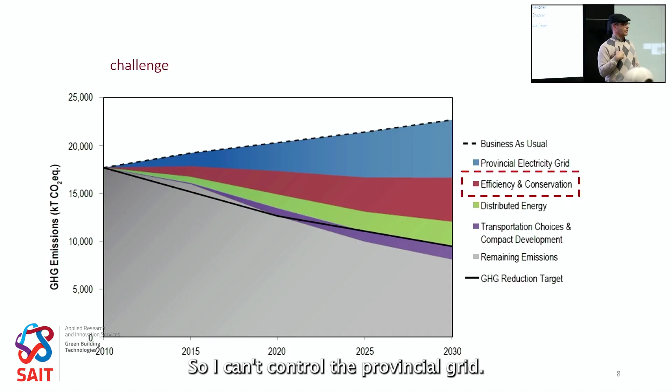The second thing I wanted to point out, and this is the wedges diagram for the province that says, how are we going to address greenhouse gas emissions overall? There are a few things that are beyond our control. I can't control the provincial grid. How they make electricity, whether it comes from a coal-fired plant, a natural gas plant, wind, nuclear, or imports it from BC, I don't control that. They do. But what I do control, and the reason it's highlighted, is that red chunk. That's energy efficiency in buildings.

And I didn't put it in this set, but if you look at the energy consumption per square meter for buildings in Canada, it effectively has been flat since 1920, which is a wild thing to say, because it means in a century of energy efficiency improvements, we haven't actually demonstrated real world energy drops. If I put my cynic hat on, that's embarrassing as an industry.

Imagine if we worked in aerospace and you said, yeah, we fly the same way we did in 1926. You would be laughed out of the room. People would look at you and go, that is ridiculous, because wooden canvas single-seaters is all we had then. I kind of like my 747s and all my important stuff.

So if I was to summarize this in a nutshell, we have a large number of underperforming buildings, a greenhouse gas and image problem. The image problem is province-wide, and no comprehensive tools or guidelines to fix this. That's a pretty big statement. And I guess I'll have to ask the question, is that actually true?

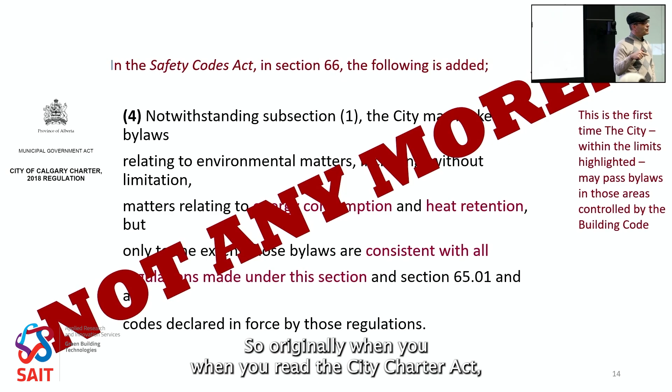This one's interesting, and I keep this in here as a reminder that nothing is forever. So originally, when you read the City Charter Act, the cities of Calgary and Edmonton were effectively allowed to set their own tiers in the energy code. That power got revoked by the province. They said, no, the province wants to set the level of tiered compliance, you have to live with it.

So we had an opportunity as a city to do whatever we wanted. We could have said we were a tier 3 city. We didn't act on it. And by the time they thought that it was a good idea to do something, the province came along and said, no, sorry, we're going to revoke that power from you. And that's why there's an important temporality to all of this, which really talks about how you deal with these things in a framework, because that's what all buildings are.

Every building, like any good architect will say this, a building is a reflection of its time, right? The reason we all go and see big cathedrals in Europe is not that we can't build them anymore, we won't. The days of having a 240-year project by master stonemasons for a church, it was wonderful. They're beautiful buildings. It ain't going to happen in my lifetime, and certainly not anymore. It's out of its context. Well, the same thing can happen in legislation.

So, long story short, for the last half dozen years or so, we've had a couple things. We've had an obligation to create and update plans. We can use environmental considerations in approving development and development permits, and we may put in place incentives to encourage. And that's not a bad set of rules to follow if you're going to want to build better buildings.

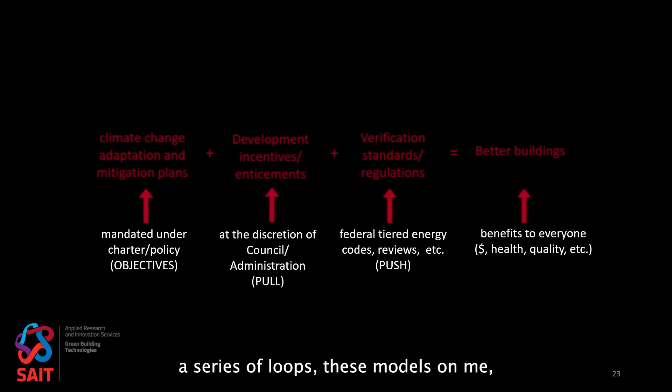And what I would suggest is there's a very simple way of looking at this, which is if I have a set of objectives that are set forth, and that's what that climate plan really does, and I can talk about a good set of incentives related to buildings that have a focus, I have my pull, and I can use energy codes and the tiers of energy codes as setting appropriate minimums, I'm going to get better buildings. And that's something this industry, as I said, has largely failed to do in a century. So that's my motivation for talking about any of this stuff today.

So let's look at some of this, because there's the realities of this, and I'm going to apologize. I am not a lawyer, and I don't know if anybody else finds the legalities of buildings at all interesting, but I will say, again, in my limited experience, the legalities of construction have as much of an impact on the project as anybody's design and anybody's craftsmanship, because they're expensive and people get sued in them an awful lot. And I do have to share this with you.

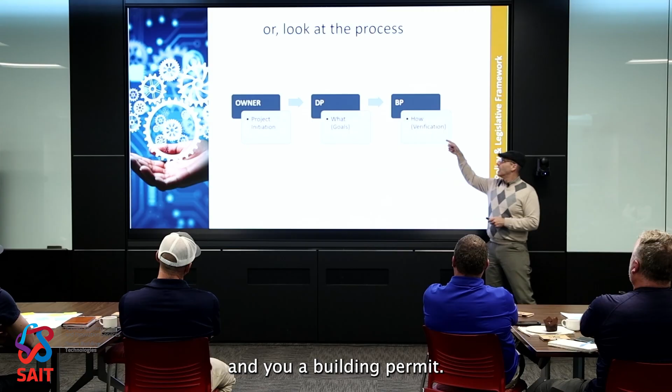And the other way to look at projects, of course, and it's not perfect for all of Alberta, but it's close. But in Alberta, you have kind of a general three-part system to talk about things. You have an owner, you have a development permit, a DP, and you have a building permit. And if I was to be very blunt in how they're done, you have somebody who initiates a project and owns it and pays for it.

You have a group of people who are looking at what the building is, how big is it, what is it used for, and you look at somebody at how it's constructed. The building permit effectively says, let's construct this thing according to what we should do. With respect to energy, the owner largely gets to set the goals. We'll talk about what that means in a second.

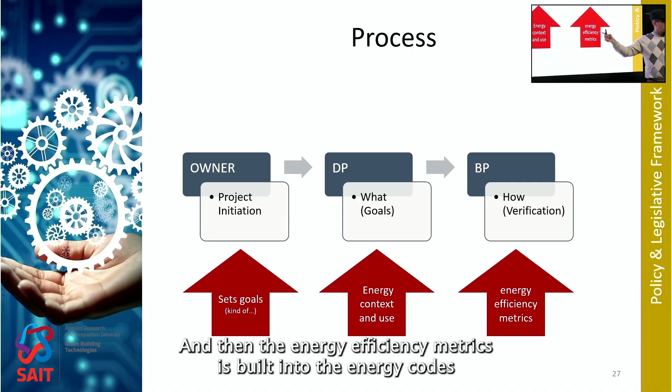Development permits set a lot of the context. So by the time you've filled out a DP, I know how big the building is, I know how tall it is, I know how much glazing it has. I've set the context. I've actually set about 35% of its energy consumption, to be honest. And then the energy efficiency metrics is built into the energy codes of how you do it. So that's what you are actually putting in there.

What is the efficiency of the HVAC units? What is the R value of the wall? What is the U value of the window? What is the air leakage of that assembly? All of those things are built into that. Together, they actually provide the whole picture for energy efficiency. And I think we have to understand a couple things.

Let's start with the base of this, which is a provincial authority, and understand two things. As I just covered in that city charter, it's unequivocally now the province sets the minimum standard. Okay? We're tier 1 province, but that's it. The province sets that level. However, two points that are often missed. An owner can do anything they want if it exceeds code.

Again, think of a code as a floor. I have to hit the floor, but I can also be up here. An owner can choose to do that. It's completely their prerogative. Anything that exceeds code, they're more than welcome to do. Second part that is often forgotten is owners.

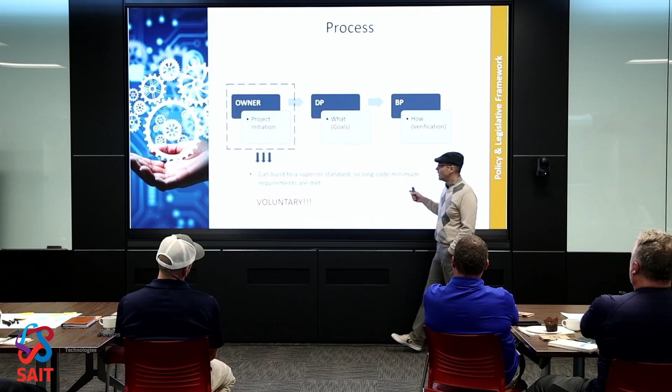When you read the Alberta Building Code, it is, again, crystal clear. Owners are responsible for building code compliance. Not consultants, not contractors, not cities. Owners. That's why those two statements are really interlinked. Because the owner is responsible for achieving the minimum standard, they can also set their own standard that's in excess of that. So, when I say they kind of set their own objectives, an owner can build to any standard they want provided it meets code, but it is absolutely voluntary.

Well, one of the things that's been really interesting in the last few years is the growing importance of energy efficiency. So don't take my word for it, take Jay Westman's for it. Just a very wealthy man, because he understood something several years ago. He could sell energy efficiency as a package to people. So Jayman does offer tier 1, 2, and 3, I believe it is, of energy efficiency packages to every home they sell. Because almost 2/3 of the people think there's a value in that. And they will give them money to do that work.

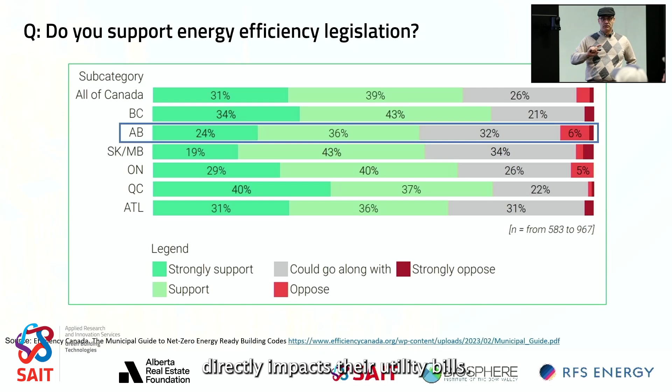The second thing is, legislatively, the public is actually in support of minimum energy efficiency legislation. And the reason being, I think, is twofold. Number one, people want to feel good about their purchase of a building, and they want to know it's constructed to a certain level of energy efficiency. Number two, it directly impacts their utility bills. Like, there's an economics driver behind all of this too. And it's funny, like when we talk about gas bills on a house, yeah, it's a few hundred dollars.

Go heat a warehouse one afternoon and see what their utility bills are, because all of a sudden now it's several $1,000s a month to heat a building, and that's a big number. You know, if you're ever leasing space, just again, I'll point it out. Don't take my word for it, but next time just check out what the op costs for leasing warehouse or commercial space are, because it's going to be somewhere between $4 and $14 a square foot. That's a non-trivial number, guys. Like, that is a lot of money that's leaving your pocket.

Right now, if I go downtown, because of the vacancy rates, I will pay more in op costs than I do for leasing commercial space. Op cost is basically utilities, the property. It's all the operational costs that the tenant pays for the owner of the building. But utilities are an enormous part of that. So it's not a non-trivial, it's not a non-zero number.

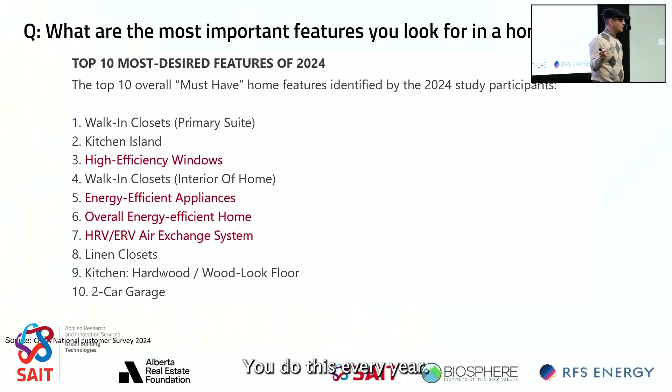Last thing, I always like this one, because when people are asked, hey, what's important to you? This is the list. This is done by the Canadian Home Builders Association. They do this every year. They basically run a survey that says what's important so we can help our builders build better homes and more sellable homes. Well, everything in red is directly tied to energy consumption. So almost half the list is some form of energy efficiency things.

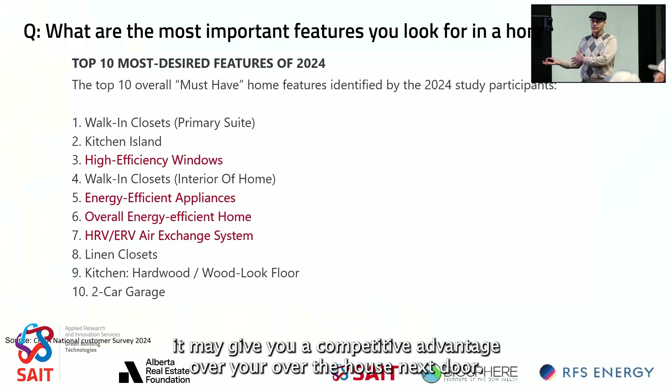Why am I boring you with this? Because the economics to making a more energy efficient home are actually there now. It's not a huge capital cost increase. It is a sellable feature that has a value intrinsic to people, and it may give you a competitive advantage over the house next door. Those are all important things if you're building 500 tract homes a year.

Now, with all of that said, as I mentioned, any kind of energy efficiency standard that's above the bare minimum is going to be voluntary. And how do you keep that in mind? I just put a pin in that, because part of the reason we have papers on the desk is we're going to ask you to think about that in a while. But please just mentally put a note in that question of how do you help or encourage somebody to do above code.

Speaking of codes, let's talk about the Safety Codes Act. The Safety Codes Act is probably the biggest one here. In short, the Safety Codes Act is a piece of legislation that makes a building code a law. Okay? If I was to just dumb it down, it sets your minimum standards, gives you procedures, gives you a legislative framework through which you can enforce building codes.

That's why when you are in industry, you will often hear the City of Calgary referred to as, and I quote, an authority having jurisdiction. That's the language that the Safety Codes Act uses to ensure that the City of Calgary gets to enforce building codes.

Just a couple quick pieces of legislation, and again, I'm not going to pretend to be a lawyer, but there's a relationship between NECB, which is the National Energy Code of Canada for Buildings, which talks about large buildings, and 9.36, which talks about smaller buildings. But the one I want to talk about most is actually this box up here. And that box is important for two reasons. You can read it at your leisure. I'll just fill in the background.

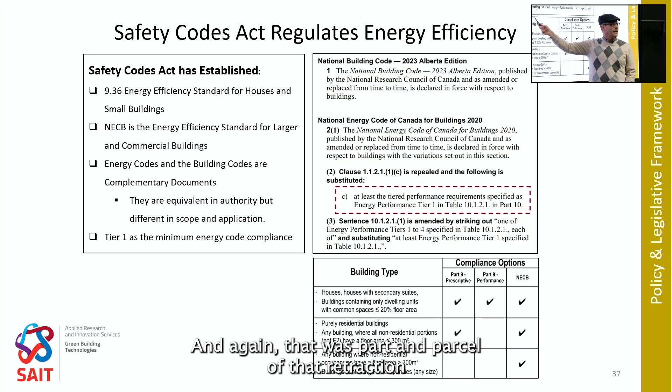It just lists the documents. It doesn't say, do this, and if you have time, do that, or do this instead of that. It doesn't say that at all. It says, here's two pieces of legislation. Go follow them. The second thing I wanted to point out, it did establish what we have as a Tier 1 province. And again, that was part and parcel of that retraction of the city charter rules that said, nope, you don't get this side. The province is going to decide for you.

Going on to this, the Safety Codes Act affects the last part of the typical process. It really talks about how you are going to do this stuff. And I'm of the opinion that there are a lot of ways you can measure building performance. Tiered codes just happens to be the easiest. And easy is important in this one because not everybody's going to be an energy codes expert.

So my colleagues in the planning department, or my former colleagues in the planning department, might have wonderful intentions. I don't want to see them try to finagle an engineering solution. That is not their layer of expertise. They're not going to know what they're doing, and they don't have sufficient information when they're looking at it to have any kind of semblance of direction for that. So, tiered codes give a very organized and very systematic way of evaluating something's energy performance.

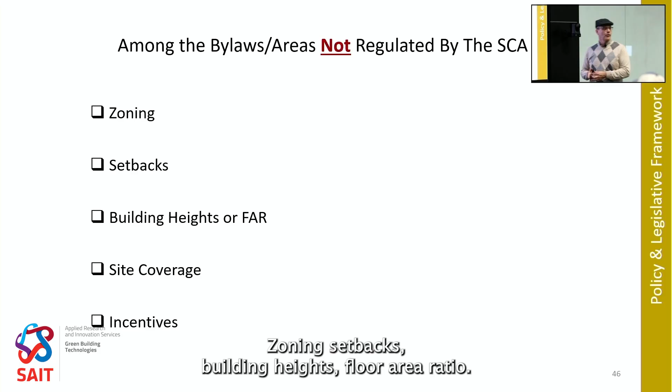But again, there are a lot of parts of buildings that are not regulated in the Safety Codes Act or under the building code. Zoning, setbacks, building heights, FAR is floor area ratio. That's the amount of built floor area compared to site. That's all it is. Site coverage, how much of the lot you can cover with building. And this is the big one. Doesn't cover incentives.

Which brings us back to this question. As I said before, please put a pin in that. Because if the question really is, how do you get somebody to voluntarily build better? I'm not entirely sure that isn't part of the answer. I can't make them do it, but I can encourage them to do it. And it's a little different than governments are used to doing. Governments are very good at saying, do X, not Y. Done. We're not very good at saying, do X instead of Y, because it's a little bit more complicated of an issue to do that.

We're going to go through this pretty quick, because I don't know what we're doing for time, but I think we're probably running a little bit longer. Some of the things, we'll probably have these up when we ask you for your feedback.

You can talk about bonus density. You can talk about policies requiring new development to meet higher tiers. How is that different, by the way, than saying you must do it? That's an option. If you want to build that building, you have to do this, or you can build this building without doing it. You can expedite permits. Okay, time is money. It's literally in buildings because they're all financed.

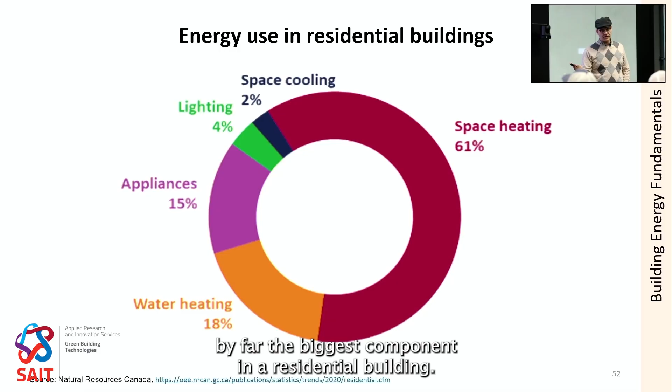Number one, the red and the orange are heat and hot water. By far the biggest component in a residential building. It's not even close. Because that is, I'm just going to eyeball it, roughly 80% of the energy consumption in a building. What does that mean? It means somebody selling me a slightly more efficient air conditioner under the premise that it's going to save me a lot of money is lying to me. That's what your takeaway should be.

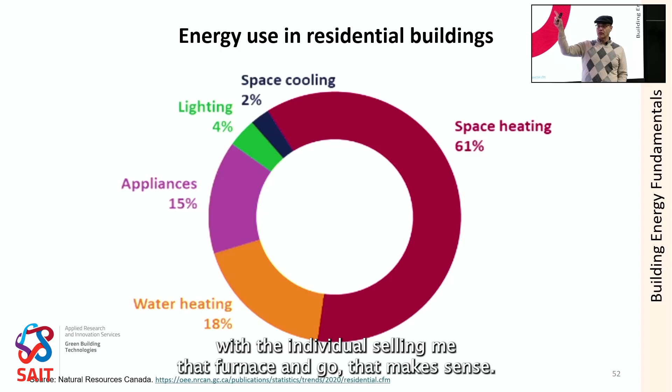But it does say if I have a 40-year-old furnace in a house that has a $400 a month gas bill, and I can get another 15% efficiency by upgrading it, that's probably worth my time. I would happily sit down and go through the brochure with the individual who's selling me that furnace and go, that makes sense.

We have to do a little boring physics on this because, I'm going to go back one, if this is the big part of the problem, then we better understand what the fundamentals of that part of the problem are. And that means we have to do a little bit of physics here. So first thing, I'm going to make a statement everybody understands, but very few people apply. Heat has to flow from hot to cold.

Okay? Which means in our climate, pretend this is an outside wall, humor me for a moment, I'm generally losing heat through walls and windows. There's a couple days out of the year where I will gain it. And yes, I do get solar heat gain even when it's minus 30 if my windows are arranged correctly. But the vast majority of the heat is going that way through the wall.

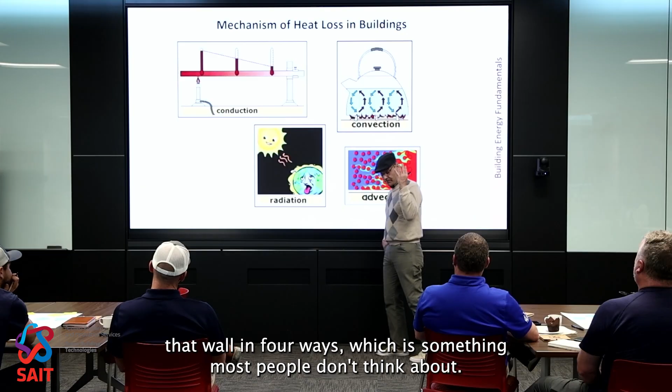The second thing to realize is it's going through that wall in 4 ways, which is something most people don't think about. While the first statement's obvious, the second one probably isn't. We have conduction, convection, radiation, and advection. So conduction, heat flow through a solid, okay? That's why your drywall is cold. That's why heat's going through the wall.

Convection, movement of fluids to carry heat. So whenever you feel that draft in the wintertime by your window, it's often just cold air that is flowing down the surface of the window. That's the actual draft you feel. It's convective current. Radiation, I know it sounds complicated. It's just the emission of infrared heat over a body. Entirely dependent on temperature, just does what it does.

Last one is advection. It's a fancy word for saying something that's quite obvious. It is the transfer of heat by carrying mass. So the example I always use, if I take a pot of boiling water outside and leave it there, I have not only carried water, I've carried a wicked amount of heat with that water. So while buildings don't typically carry water outside, they do leak air. So whenever you see the word advection, think air leakage. You're taking hot, moist air from the inside, and it's leaking to the outside.

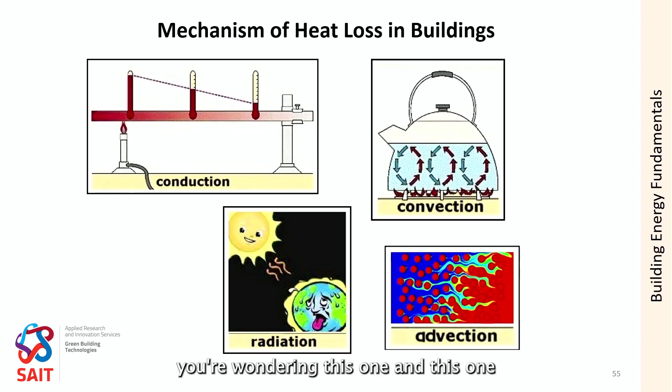I should back up for a second. In case you're wondering, this one and this one is what the code focuses on. Whenever you hear R value in a wall or U value in a window, it's just a measure of the conductive heat loss. When you hear air tightness or blower door test or air leakage, you're talking about advection. That's it. If you take nothing away from today, know that that's what the energy codes really do focus on. And why? Because they're 90% of the problem.

I do have to point out, if I take a window, windows are really interesting because they've got all 4 in spades. And that's why I always use that, because it sounds abstract to talk about radiation in a building. But take a window. So I'm going to have conductive heat loss through the individual sheets of glass and through the frames and the sashes. Right? It's solid. Heat loss is coming through those.

But I also have advection because I have air leakage around the frames, right? Air, depending on how well the window is installed, the transition between the window and the wall. I'm also going to have, if you ever look at your house, most people have double pane windows. You ever notice how consistent the spacing on those is? It's not an accident. It's because you don't want a 4-inch gap between those, because I will set up a huge convective loop inside that window. They are actually spaced an engineered amount apart, usually between 10 and 12 millimeters, to optimize the loss of conduction without forming convective loops.

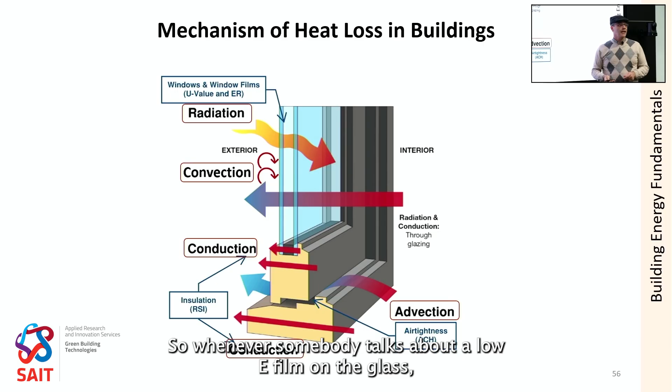And the last one is radiation. So whenever somebody talks about a low E film on the glass, we've all heard the term. The E in that low E is emissivity. You know what emissivity is? A measure of how broad the radiation spectrum emission is. It's a shorthand for basically saying this is how you measure the radiation emission for this. That's it. One window, all four. I always think that's kind of neat.

I'm going to go through this real quick just because it's just backgrounder, but R value is important because it's a thermal resistance for conduction. U value is the way of measuring thermal conduction, but it's the inverse. And that's the relationship. And I can't tell you how many times when we were talking to industry when the energy codes first came out, that was a big part of it. How you measure those things is critical. So understand that you need to be looking at RSI and USI values, and that for RSI, the better performer is when the number goes up, and for USI, the better performer is when the number goes down.

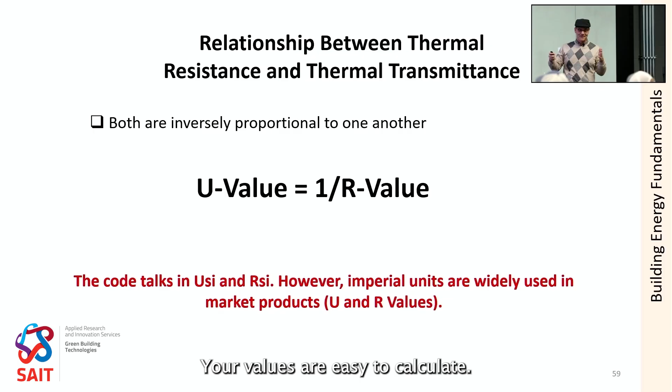And yes, I'm not going to apologize for it, but that's 100 years of industry convention. And it's really interesting. I hate to be blunt: contractor, engineer. That's literally the way to divide it up. Engineers love U values. Contractors love R values because they're intuitive. U values are easier to calculate with, or using calculations.

The other part I just want to make clear on these things is think back to that circle we showed where the space heating was 80% of the energy consumption. I love and hate these kinds of diagrams. I love them because they're good at simplifying complicated things. I hate them because they're extremely misleading, for one simple reason. Okay, I can talk about drafts being 12% of the energy loss, or walls being 33%. What happens when I put in better walls, though? It no longer loses 33% through the wall. So not only do I shrink the size of the circle of energy consumption, I actually change the proportions of where this stuff goes.

That is why when we talk about code compliance, the vast, vast majority of people don't want to use prescriptive. They want to use a performance model. And what a performance model does is basically understand that I can not only change the amount of energy this building is going to consume, but I can also tweak where it's going. And by being able to tweak where it's going, you can often get enormous performance gains. So that's important because, allow me to give a very simple analogy.

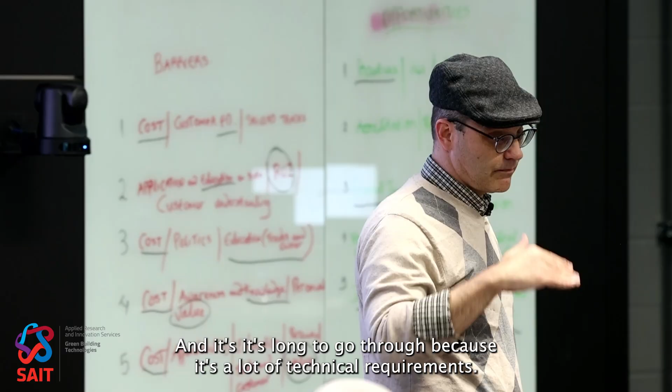What I'd like to talk about now is let's get into the code just a bit. And again, my goal this morning is not to walk you through all the technical requirements of the code. It's available online. It is free of charge. We're working with the city of Calgary to build an entire compendium document, like a manual that says this is how you measure this. This is how this should look. This is how the parts fit together. This is how an energy modeling report should look. We have all of that stuff there, and it's long to go through because it's a lot of technical requirements.

But we do have to touch on certain aspects of the code, because I think it's really important to see how codes change over time. If you recall back to when we talked about the city charter saying you need a climate change adaptation and climate change mitigation plan, one of the requirements was you've got to go back to it every 5 years and fix it because you're not going to get it right. Codes work the exact same way, right? We are constantly rewriting codes.

I guess I never actually introduced myself this morning. That's kind of funny. I'm Justin. Hi.

One of my side hobbies, in case you're wondering why I do a lot of these presentations, is I actually sit on the committees that help write all these codes. So if you ever can't sleep and you decide to break out your NECB, if you look at the authors page, I'm on there with a number of other people who sit on the committee. Back in that day, for that iteration of the codes, it was the Standing Committee on Energy Efficiency, and now it's basically the Codes Commission on Mitigation, Adaptation, and Climate Change. So they've reframed the exact same objectives of how do you make buildings more energy efficient and given them a new structure. But I keep going on writing these codes because they always change.

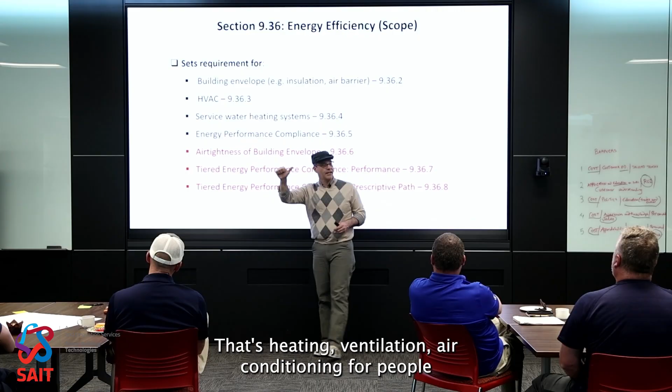That's heating, ventilation, air conditioning for people who aren't familiar with that word, although it's pretty common. 9.36.3; service water heating is 9.36.4. So those are all the technical requirements. So that is, if I'm following prescriptive and I just want to do what the book says, this is going to tell me what the efficiency of my hot water tank should be. So it's the kind of things you can check on a boilerplate and go, yep, you've done your job.

This is where energy codes get different from everything else. 9.36.5 is performance compliance. That is how to set up an energy model to demonstrate that your building performs as well as a prescriptive would have without having to do any of that stuff.

Indulge me for a second. Remember that house with all the arrows that showed the energy flows? Those energy flows are figured out by doing an energy simulation. So at any one point on that building, I can take a chunk of wall, okay? And it depends on the software you use, but it's either going to be a square foot, a square meter, or a square centimeter. But I can look at that chunk of wall, and the minute I know what the inside temperature is, what the outside temperature is, I know how much heat's flowing through that section of wall.

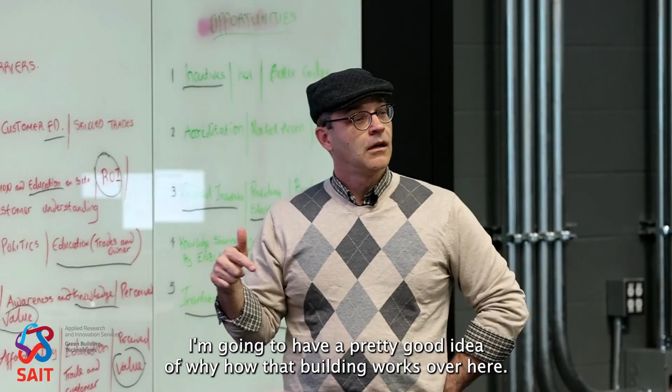And then I do the same for a window. And then I look at the lights and say, okay, the lights are on at this point, and they're going to give off this much heat, and it requires this much cooling to deal with it. And if I do that, here's a weird number, 8,760 times, I'm going to have a pretty good idea of how that building works over a year. Where does the number 8,760 come from? That's the number of hours in a year.

So what an energy model does is essentially this. Every hour, I'm going to figure out if the lights are on, if the furnace is on, what the inside and outside temperatures are, and where the energy is going. And then I'm just going to add it all up. And the beauty of doing that is I no longer have to follow a single rule. But what I do have to do is be very diligent on how I've done that calculation. So that's where this separates out, because there is no equivalent in the life safety standards.

So I'll give you an example. Part 3 of the Alberta Building Code, right? If you look up exit corridor, the number is 1,100 millimeters. Not 1,100 millimeters if there's 25 people in the room and 1,200 if there's 55. Or show me that I can go down a corridor that's 1,000 millimeters wide if it doesn't have any rough surfaces. It doesn't say any of that. It's 1,100 millimeters. That's how you comply with that code. It's entirely prescriptive.

This is the one that says energy is not the same as that, because energy systems aren't additive. And if I was to dumb it down really simply for a lay person, these are fluorescents. I'm going to throw somewhere in the neighborhood of 30 watts into these tubes, okay? Of that 30 watts, I'm going to get a certain amount of light. I'm also going to get about 22 watts of heat. The building has to deal with that heat.

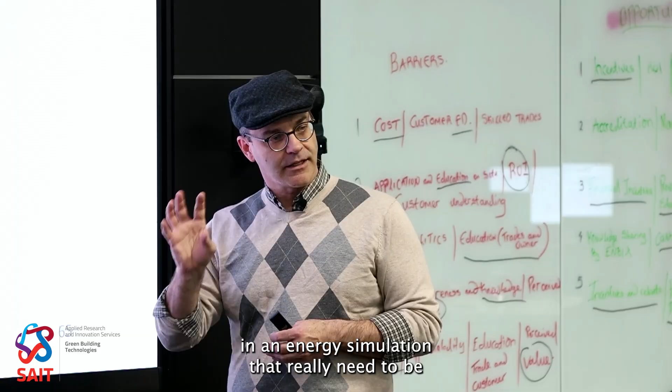It either goes into the space as supplementary heating, or in a room like this, because it's not losing heat anywhere, I have a cooling system that has to pull that out. Or this room at the end of the day is going to be 45 degrees C. And that's uncomfortable. So you have all of these interdependencies in an energy simulation that you really need to be well-versed in, is the way I would phrase it.

The red ones are new sections. So this is, as I said, codes change. The red is all the new stuff. Air tightness of building envelope. Huge change from the last one. I hate doing this, but just to show we haven't all wasted our time together this morning, could somebody yell out what the heat loss mechanism of air leakage is? I see somebody mouthing it. That's good enough. It's advective air.

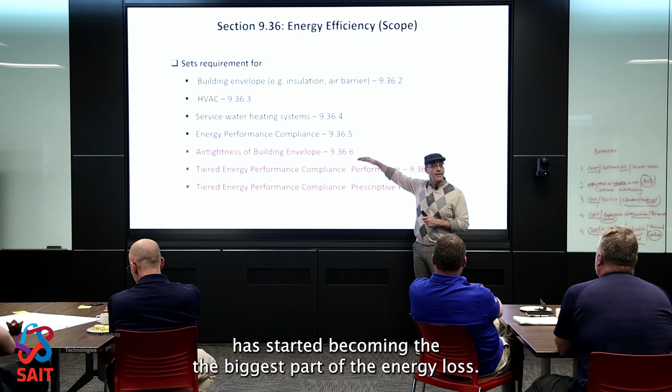It's advective heat loss. But this has become a big part of it. And again, think back to what I was saying this morning about the proportions. Why? Because we've gotten good enough at the envelope that air leakage has started becoming the biggest part of the energy loss. That's why it has to be improved. Here's the tiers.

There's 2 ways to comply in 936, and we'll go through those at a little bit of depth because, well, frankly, that's why we're here this morning. Let's look at some of the changes in the building envelope. We'll just do this very quickly, capture a couple of key components that are really fundamental to understanding the tiers, and a couple of key features that are new.

We'll go back to this guy. There's my energy loss for my building. As I've said, the circle can get bigger or smaller depending on how overall energy efficient the building is. The proportions can change. The one we're dealing with now, building envelope, affects directly space cooling and space heating. So somewhere about 2/3 of the energy. If we were doing the compliance one, I would say from a 936 perspective, that's where I would spend at least 3/4 of my time if I was a safety codes officer still. I'd be worried about the envelope because it's the biggest chunk of the energy puzzle.

A couple things that are in here. You can read this. I'm assuming we're going to distribute the presentation afterwards. Okay. Read these at your leisure. It's probably not worth us going into it in a big way, but everything from updates to log walls, who cares, to changing the rules around Part 10.

So fundamental concepts of building envelope are really simple. We break the building envelope down into parts. And that's important because not all parts have the same ability to get upgraded. And I probably didn't mention this earlier, but I should. Whenever we make a code change at the national level, one of the things we are obligated to do is a cost-benefit analysis. And that's a big part of it because housing affordability is a big concern for everybody.

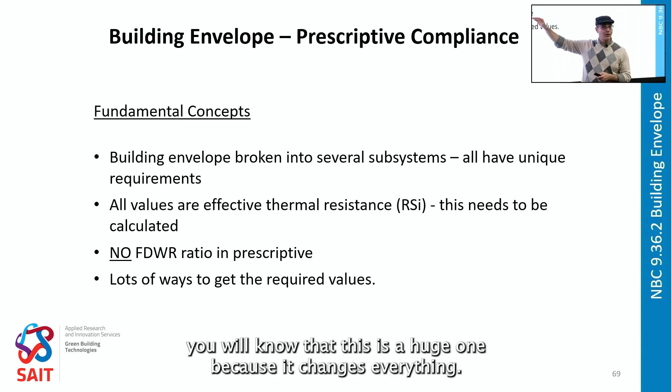Everything in an energy code is effective thermal resistance, not nominal. We'll talk about that in a second. This is a huge one. And if anybody is ever working with NECB, you will know that this is a huge one because it changes everything. FDWR, fenestration and door to wall ratio. That probably still doesn't mean anything. Think about it this way. Fenestration is your windows. Doors are doors. Wall is the opaque sections of a wall, so the stuff that's not a window. And the ratio is the percentage I can have of each of those. Why is that so important? Because as I mentioned earlier, a window is about 6 times more thermally conductive than a wall.

So if I have to reduce energy consumption on a building, one of the fastest, cheapest, technically price positive, well, one of the things I'm very tempted to do, make the window smaller. Go look at a research station in Antarctica, and they just have these little portal windows because that's all they can afford in terms of the thermal losses.

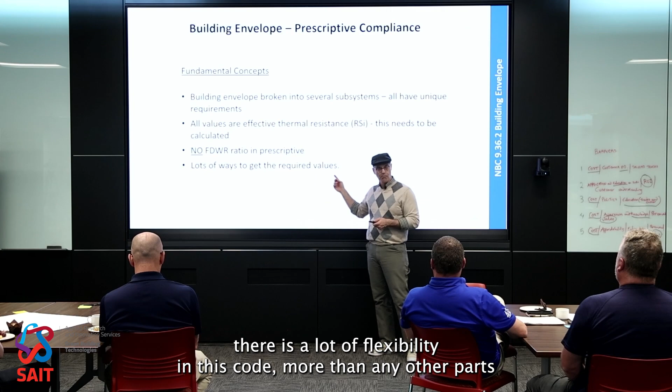Last thing, there is a lot of flexibility in this code, more than any other parts of the NBC. And that flexibility is both a positive and a negative. It's a positive in the sense that it does give you a lot of compliance options. It's a negative in that it is much more complicated to write a code with options. We'll go back to that corridor. It is really easy for a building inspector to go, is this an exit corridor? And when somebody says yes, to go to the tape measure and go, yep, it's 1,100 millimeters or wider. That's an exit corridor where I come from.

It's a lot tougher to say, oh, I've improved my windows, so I've degraded my wall, and at the same time, I've improved the efficiency of my hot water tank because I didn't want to use a heat pump in my heating system. Well, wait a second. Now I've got 4 things all talking to each other. That's a very complex code from that perspective.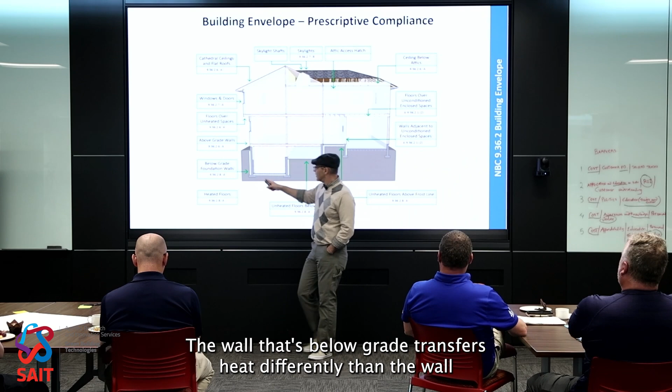This is just a little handy-dandy guide, and we're not going to go into this in depth. But as an indicator of how many parts there are, the CHBA actually put this diagram out that said, let's understand something. The wall that's below grade transfers heat differently than the wall that's above grade. Why? Two reasons. Number one, I'm allowed to keep basements at a colder temperature in the code. They actually only have to be heated to 15 degrees, whereas upstairs has to be 22.

Second part, this dirt 8 feet down is only going to vary between maybe 0 and 7 degrees C. That's the thermal driver. This air can go between plus 35 to minus 35. Huge differences. If I'm going to construct an energy simulation, I need to know all that stuff. We haven't even gotten into the fact that if this wall's in sunlight, that skin temperature is not air temperature. That skin temperature might be 60 degrees C.

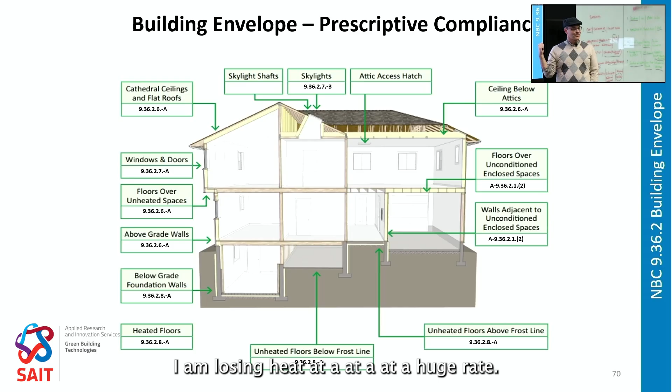So on the coldest day of the year, I might have heat coming in on that wall, and on the north wall, I am losing heat at a huge rate. So you can understand how, again, the complexity of this can come back to it. But in general, things are defined broadly as either in contact with ground or not in contact with ground. And I know it sounds funny to say a floor not in contact with ground, but that's code language for a cantilever.

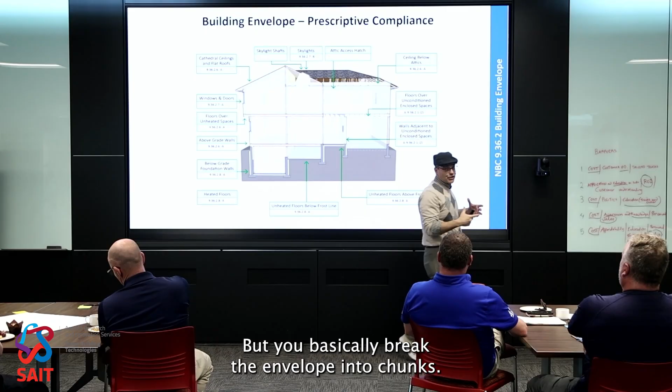Windows are separate, roofs are separate, and they're broken down to attic roofs and cathedral roofs, but you basically break the envelope into chunks, is what you do. And they each have their own requirement. All of those RSI values that are in the code are effective, as I mentioned. An effective R value means not the nominal, but what does the assembly get? Okay, that is a calculation.

I mean, I've been doing this a while. I can tummy rub and get you close, maybe 5 or 10%, but nobody knows exactly what that translation is. We'll talk about that in a second. But the nominal is basically this. When you see a bag of insulation on site or the Styrofoam SM printing on the side of the material, it's a reflection on the material. The effective R value is how that assembly behaves.

So it understands that I've got other components that contribute to thermal resistance. I also have bridges or breaks in the insulation that say, oh, that's going to be a degradation. And you have to calculate that out. There's no other way around it. I always say this to my former colleagues at the city, I wish I could tell you one was always bigger than the other. I can't. It depends on the insulation type, where it's placed, if it's exterior continuous or not, et cetera.

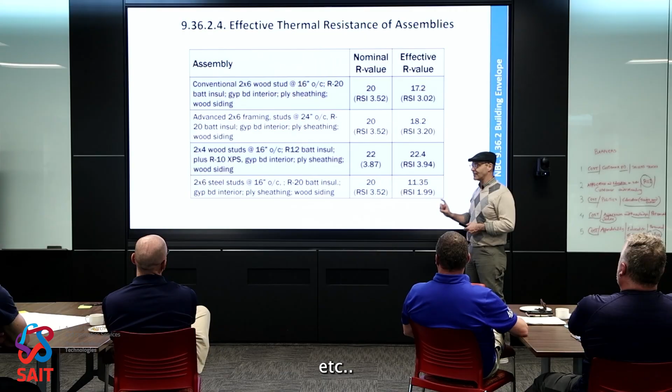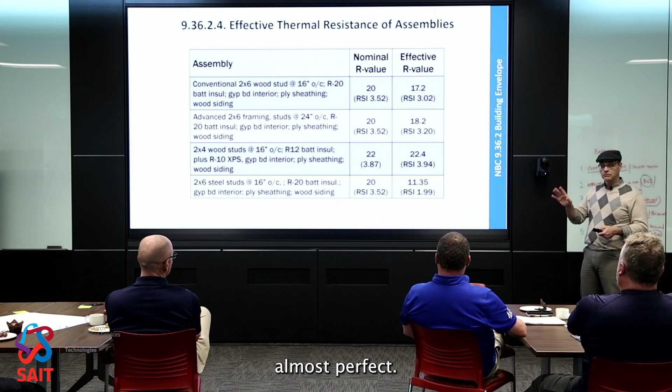Basically, this is just a quick comparison between nominal insulation values and effective, but I do want to point something out. They can be vastly different numbers, especially if you're dealing with steel and concrete buildings. The minute you put steel in a wall, I have an almost perfect thermal conductor. Almost perfect. If you actually look at steel studs, that's how they're calculated. Hypothetically, if this blue line is the steel stud, not only do I worry about what the insulation is here, I actually have to zone it out because this thing is so conductive of heat, it will draw heat laterally into itself through the wall.

Concrete's not a whole lot better. As an indicator, just good rules of thumb. If I'm looking at insulation or anything that's readily available, I'm looking somewhere between R3 and 5 per inch. Okay, RSI, or R, thermal, like imperial R. Wood, about R1 per inch. Concrete, about 0.1 per inch. So about 10 times more heat conductive than wood.

I go to steel, depending on whose numbers, but it's generally 0.0000 something. About 1,000 times more conductive than wood. Yeah, those are non-trivial numbers. Like you can't put a giant chunk of steel in a wall and go, I don't see a difference. There's the difference.

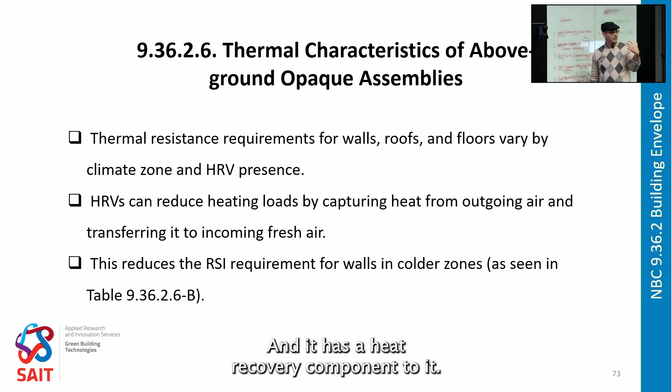When we talk about all of these things, one of the things that is really interesting in this is the presence of an HRV. HRV, heat recovery ventilator, you may have heard of. You also get the term ERV, energy recovery ventilator. It basically means it's a powered device that pushes air in and out. It ventilates the building, hence the ventilator, and it has a heat recovery component to it. When you are looking at this, you have to understand that the R values are going to change whether or not there's an HRV.

That is unique to 9.36, by the way. But it's important. And the reason it's done, I can explain the logic path that led to it: HRVs are not mandatory in 9.36. So what they wanted to do was say, well, how do I set up an equivalent level of performance between a house that has an HRV and one that doesn't?

And so what they did is they modeled the HRV houses, and then they made you add additional insulation if you don't put in an HRV to compensate for the heat loss through the ventilation system. So it was an attempt to balance this stuff out. Why? Because code should be intrinsically fair. They're not, but that's what they try to do.

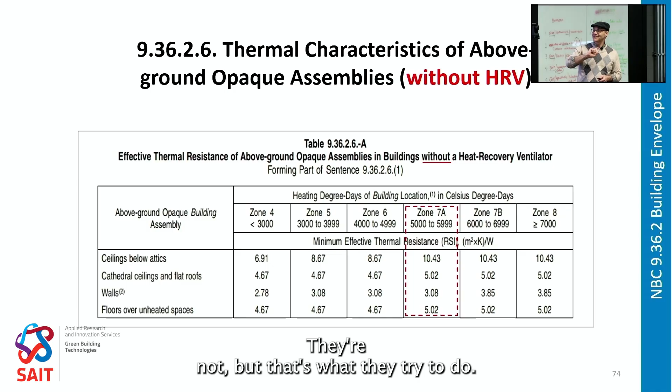But I just want to point out a couple things. So this happens to be without, but again, when I said certain parts are easier or harder to insulate, you'll note that you are required to put about 3 times as much insulation into an attic as you are to a wall in a house in Canada, in our heat climate zone.

The other thing I should point out, just because it might be a new term for some of the people here: the concept of climate zone and heating degree day. If I use heating degree day, can I get a quick show of hands? Does that mean anything to anybody? A few. Let's take just 30 seconds.

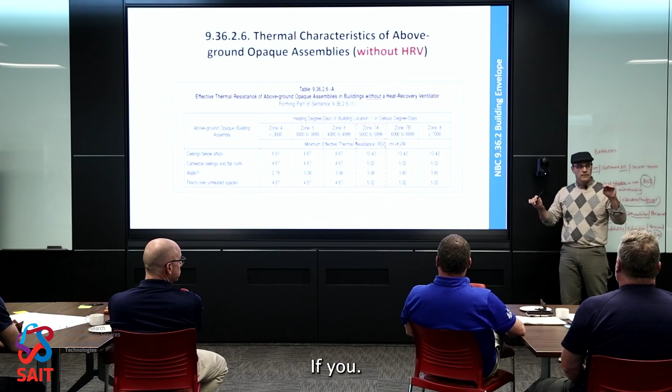Heating degree day is a number, okay? And that number is going to range in Canada somewhere between 2,800 and 13,000. What does it tell me? It tells me two things. Effectively, it's a measurement of how cold it's going to get and how long that cold is going to last. So basically, the larger the number, the more coldness I can expect. Coldness being temperature or duration or both. And it's just a calculated number.

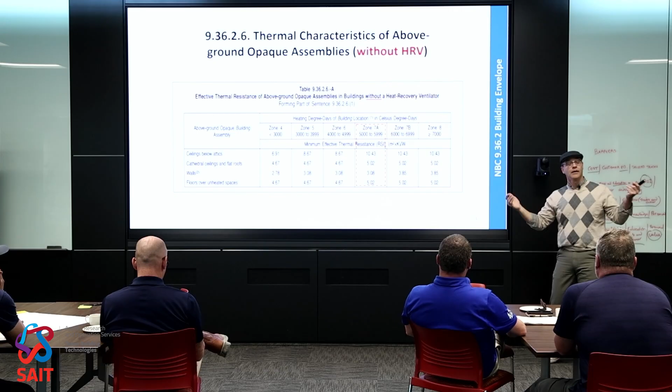If you ever can't sleep one night, Appendix C has hundreds of locations across Canada and their heating degree day zones. So it's just a way of measuring basically the climate you're in and where your building's going. Calgary just happens to be exactly 5,000. It's an easy number to remember. Zone 7A.

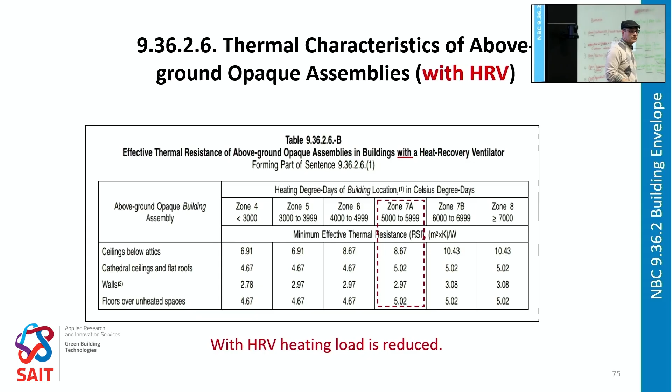Again, this is just to demonstrate the change in the values. That was 10.43 without an HRV. It drops by over a full point because you put in an HRV. Just in case you're wondering, I always like to tell people to stick a pin in an idea. When we come to the next set of questions, we're going to talk about cost

benefits of these things. This should be a big part of it because this entire change of numbers is dollars driven. Nothing to do with building performance, nothing to do with the mechanics, all of it to do with dollars in and how much you can change something in a building.

Windows. Windows have two ways of being measured in here. As I mentioned, windows use U value, not R value, so the inverse of it. So the smaller the number, the better it's performing. And because the window manufacturers can never make windows simple enough, they've also given us an ER number. An ER number works the exact opposite, where the larger the number, the better it performs.

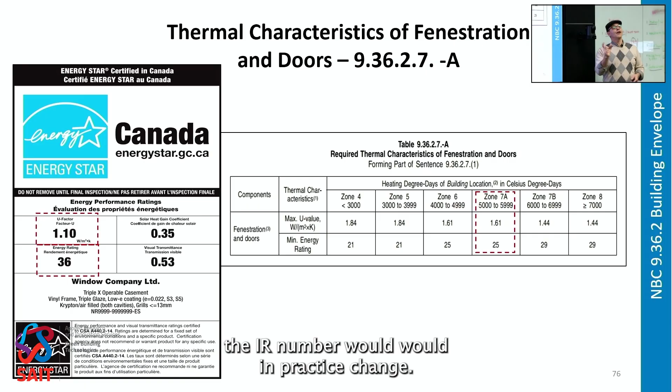But what this is trying to capture, in case you're wondering: U value is a measure of the conductive heat loss. ER is an attempt to capture the conductive heat loss, air leakage, and radiation. I personally hate it, but that's an opinion. The reason I don't like it is because the ER number would in practice change if I go from the north side of a building to the south.

And you'll note there's no criteria on this. It's not 25 if it's on the south, 21 if it's on the north. So it's a little bit of, I call this tummy rub engineering, but it's a shorthand way to try to capture a very complicated issue. It does so with moderate success.

Air tightness. Here's where we start to get into the air tightness journey. Now, for those looking to comply, or for those who are going to be using the energy code, air tightness in 9.36 is in two locations. One that is basic principles, the other for specific applications. We'll cover both. This is the general principles.

So one of the attempts to address air leakage in the NBC is you have to do a certain amount of detailing in the construction. And 9.36.2.9 sets the criteria. 9.36.2.10 tells you what to do.

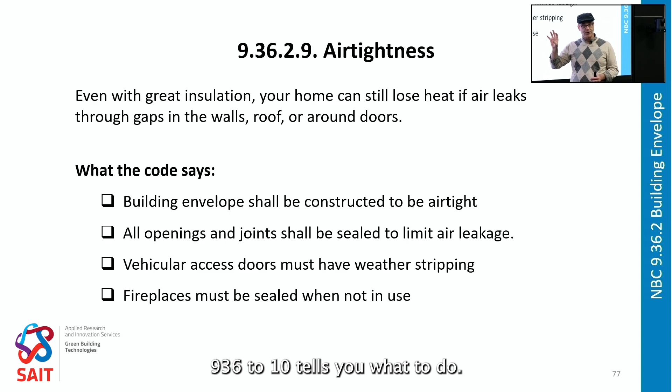The challenge with all of these things is how you measure air tightness, because without doing a blower door test, it's all a bit of hocus pocus. So if I'm doing prescriptive, 9.25 is what covers basic installation of air and moisture barriers, okay? So it talks about how you use polyethylene sheet, where it goes in a wall, what you would do with the joints, etc. 9.36.2.10 then tells me, okay, at that joint, I have to have these criteria. So you have to read the two of them together.

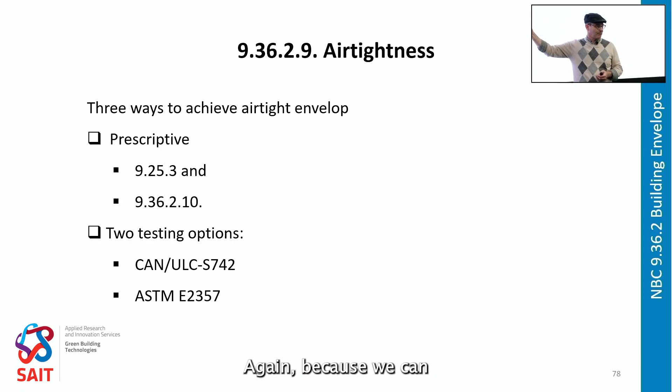You also have testing options. Again, because we can never make things simple enough in an energy code. 742 and 2357. I'm not going to bore you with the details of those. They are assembly tests. So what's important about an assembly test is twofold. Number one, it has different performance values, okay? Number two, it has a set of details that talk about the transitions. So what you may have noticed, the common thread between all of the prescriptive air barrier requirements in 9.36, this tells me how to deal with transitions. This tells me what the air leakage around a detail at a transition is. The common point of both of them, the transitions.

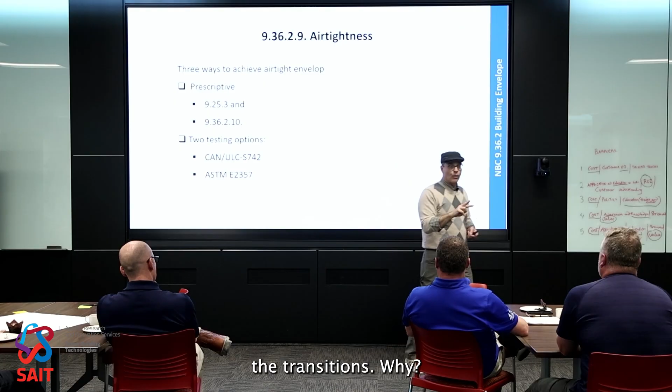Why? Because buildings do not leak at the flat parts of the wall. Okay? Glass is a great example. No one thinks about it, but glass is an absolute perfect air barrier. At where my finger is, I get exactly 0 air leakage. I don't care what the pressure is until the window snaps. What about here? What do I do with the transition? That is where 100% of the air leakage occurs, is where you have junctures and joints. That's why what is interesting about all of these, nowhere in the code does it talk about quality.

That's a problem. It's why, when we talk about the other place where air barriers are described in the code, 9.36.6, it tries to address quality, or at least how you might deal with that. Because the quality of that transition is everything if it has to be airtight. I can take the exact same materials, apply them in the same way. If I do one sloppy and one well, the air leakage will be 10 times greater in the sloppy one. And I'll share an anecdote as an idea of how complicated this is.

At one of the meetings at the standing committee, we had a representative from CHBA. We were trying to figure out what the cost of better air barriers was. And they pegged a number that said, well, that's a $3,000 per house cost. And I threw my hand up and said, it's a zero cost. And they go, how do you figure that? And I said, it's in the code of what you should have done. And the reason we had such vastly different numbers on what it should cost, they were putting a value on the time it took to do the quality. My position, right or wrong, was that the quality should have been assumed because it's in the code. There is no right answer to that, by the way.

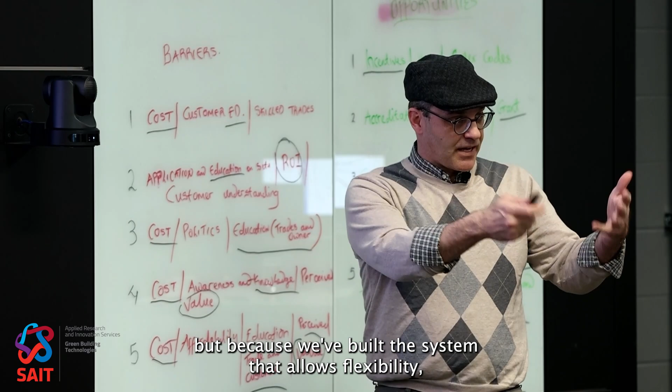I don't know what it costs. It might cost somebody $15,000 because they have to go from being completely inept to being fantastic at it. It might cost somebody nothing because they've been doing it all along. That's the trouble. I'm belaboring this point just a bit because it really sums up a lot of the energy code challenges. You've told me to do this, but because we've built the system that allows flexibility, now the quality of the installation starts to become a real challenge.

We've probably beaten up envelope enough. Let's go into HVAC, and it should be relatively straightforward. Again, it affects the exact same two areas: space heating, space cooling. Why? It's the equipment efficiencies to heat and cool your space. It does not affect water heating. I know it sounds obvious, or some people think it should. There's a whole different section for hot water, so we left that out. But again, as an indicator, part of the reason I always talk about this when we do the compliance discussion with the City of Calgary, it's basically shorthand. Pick your battles.

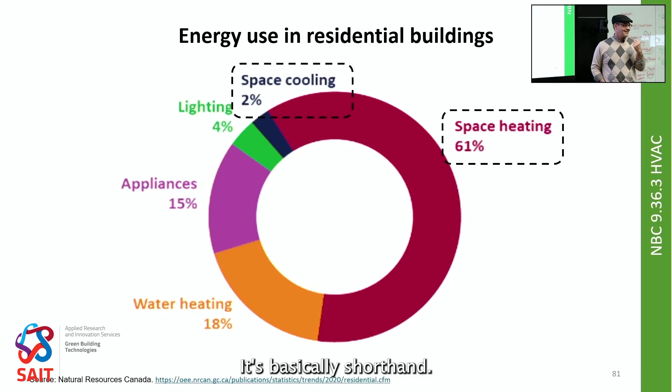So if I can look at the building envelope and the heating and ventilation equipment efficiencies, right? That's two pieces of equipment. It's your HRV and your furnace, basically. And I can look at the walls and the air leakage test. That's four numbers I have to look at. And I'm going to roughly cover 2/3 of the energy consumption in that building. Why would I look at anything else? If I have X amount of minutes to spend on this drawing, don't spend them looking at the cooling. It's just not going to help you. Let's figure out the big ones.

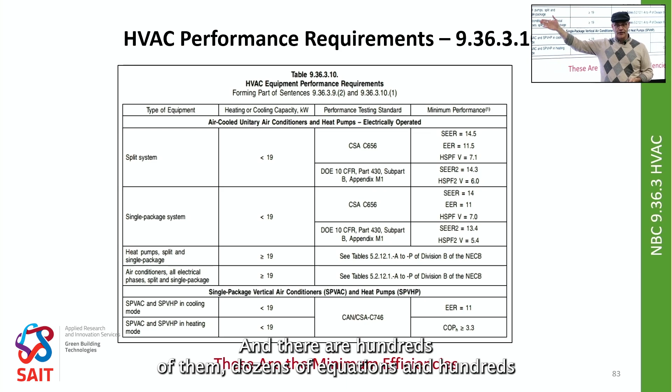And there have been very few changes to the HVAC requirement in this. The way to read these charts prescriptively is actually pretty straightforward. It's basically a sizing and efficiency exercise. So all you really have to know: what is the piece of equipment? And there are hundreds of them in the code. Okay? It'll have a size requirement.

Why? Because bigger equipment is often easier to put more efficiency measures on. And also, because you're producing so much, you're consuming so much more energy, we expect it generally to be a little bit better at what it does. And the last part, just the metric of how it's measured. And the beauty of all of this is it's on the piece of equipment boilerplate. It's one thing to look at.

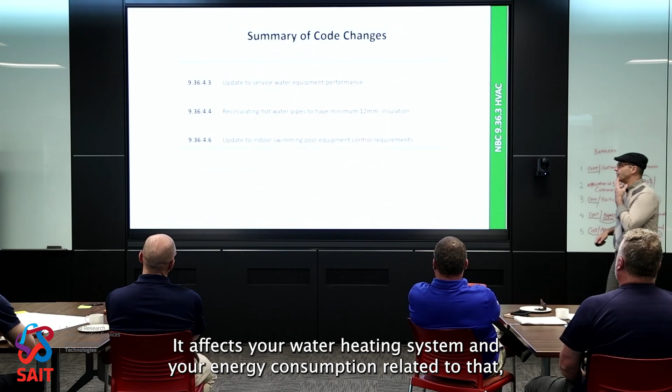Service hot water, that's the other kind of major component of 936. What a shocker, it affects your water heating system and your energy consumption related to that. A couple things. This is just, again, really more for general knowledge. Basically, the hot water systems in your home, which is different than NECB, what they're trying to cut down on is extraneous line loss. So insulating pipes and making sure those are in place. Heat traps to prevent thermal siphoning, and the equipment efficiency. That's it. It's relatively straightforward.

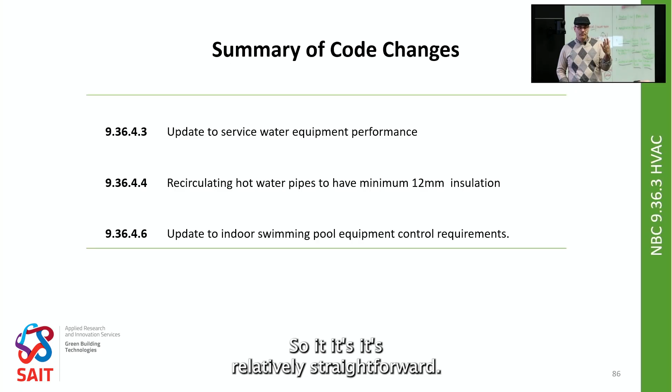It doesn't go into elaborate calculations on the number of faucets, etc. NECB does that. It talks about your consumption. But 936 is like, I got 5 people here, I'm not going to change it much, and I can't control it. So let's just look at the equipment and the insulation. Same pattern. Tell me what your fuel source is. Tell me what your sizing is. And tell me what your efficiency is. Everything's on your boilerplates. Literally.

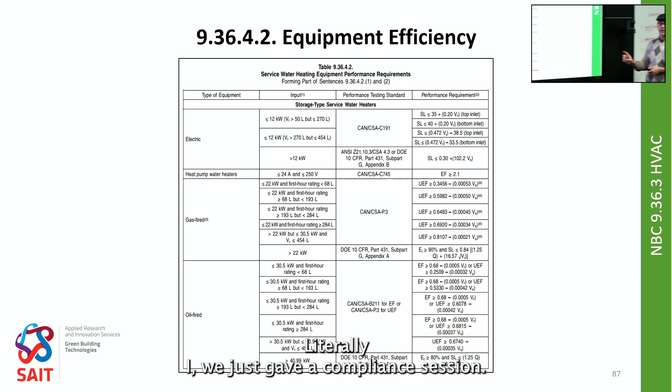We just gave a compliance session to the City of Calgary. It's shocking how much you can review in 4 minutes on these drawings, because this is literally just a note somewhere on the mechanicals page. And it's super easy to confirm. And if it's a performance model, which we'll get into in a second, then I don't care. Then I only care that they've modeled it correctly, because I don't have to meet any of these in a performance model. This is all prescriptive. We're not going to cover it today, but I do feel the obligation to just say that quickly.

Everything we've covered up till now is what we call prescriptive. Okay, so prescriptive follows that code rule that says, just do what the code says. As long as you've done that, you're gonna end up right in the ballpark. When I'm doing prescriptive like that, when I'm an inspector or a plans reviewer, I know that if it's a prescriptive, these are the numbers that get checked. And what I call that in shorthand is inspecting to code. The piece of equipment that I find on site should match what the code has asked.

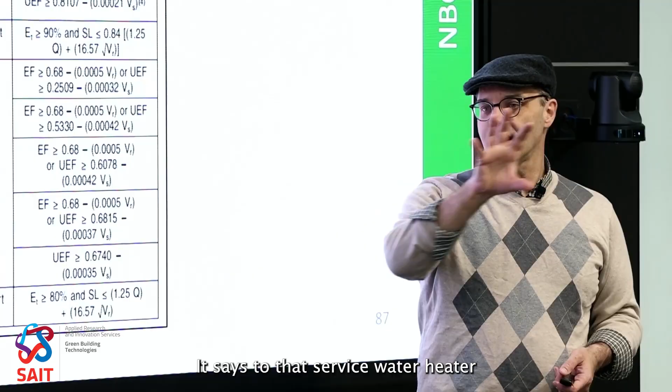In a performance model, it completely switches, because the performance model doesn't ask me to meet this number. It says that service water heater, in combination with that furnace, in combination with that HRV, in combination with these windows, this wall, this ceiling, and this orientation, overall gives me the right solution. So instead of inspecting to this on site, I have to follow what's on the drawings, because the drawings told the model what to put into it. The model shows me that they work in combination.

So that concept of inspecting to code versus inspecting to drawing, if you're in the trades or a contractor, there's your massive takeaway from the morning, to be honest. If you can understand that conceptual difference of whether you're designing this to a code requirement or whether you're designing this to a drawing set because it's been modeled, that's really foundational.

Just gonna grab a quick drink of water.

Now, that brings us conveniently into the world of energy performance compliance, energy simulations. Okay? This is where, when we talk about inspecting to drawing or inspecting to design, that's what this is applying to. So there's a whole bunch of changes that we've made here. The most important ones, I think, 2 pages worth, all hover around this. So understanding what has to be the same in a performance model.

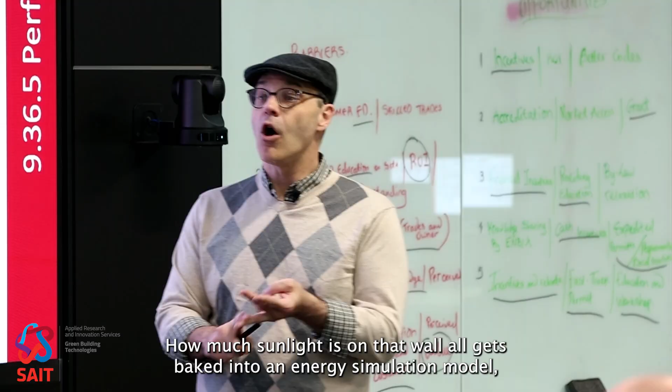All of the things that I said, the ER in the window, the outside air temperature, the direction a wall faces, how much sunlight is on that wall, all gets baked into an energy simulation model. And I can't ignore them. They are too big of a number.

I will give you an example from my own house. I built a garage, and as an architect, you have to make it a little bit fancier. So I put up Corten rusted steel sheets as the siding on it. Looks great. That building, if it's even slightly sunny and minus 30 degrees out there, I can literally not burn my hand, but get it hot at minus 30, because that sunlight on the south side of that building has picked up so much heat because it's dark steel.

In the summertime, I can actually make it like a steam show by throwing water on it. It's wild. But all of that has to get baked in. And it's something you do not have to do in a prescriptive, but the minute you are talking about a performance model, you must account for those things. It's also why, to be really honest, it provides an enormous benefit.

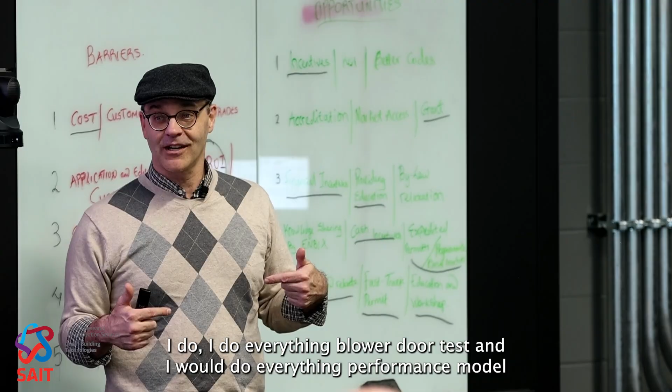If I can give you a cheat sheet, if I owned a house building company, I wouldn't even think twice. I'd do everything blower door test, and I would do everything performance model, because I can pick up all of those fringe benefits you just can't get from doing prescriptive.

There are, of course, exceptions. If the space is unconditioned, I don't care. I don't put any heat into it. Do I really care what happens to it? Probably not. Exterior lighting, again. Why? Because the heat dissipates into the atmosphere.

So how do you demonstrate compliance? It boils down to one simple sentence. I'm going to run two models. Reference, which would be a building with that geometry, that orientation, that fenestration, right? Built to prescriptive, and then the exact same geometry and orientation built to what I'm proposing.

And as long as the design you want to build uses less energy over the course of a year than the reference house, it passes. It is in some ways the most honest way a code can work. It basically says, I've told you to do all of these things, but I'm not going to make you do any of it if you can show me that you can come up with a better solution.

And it's funny because, again, I always like to tie this back to the life safety standards, because those are really well-established codes in Canada. This building's a good example. At any place in the floor plate, I should be 45 meters or less away from an exit stair. And if you pace it off, I'm sure it happens, okay?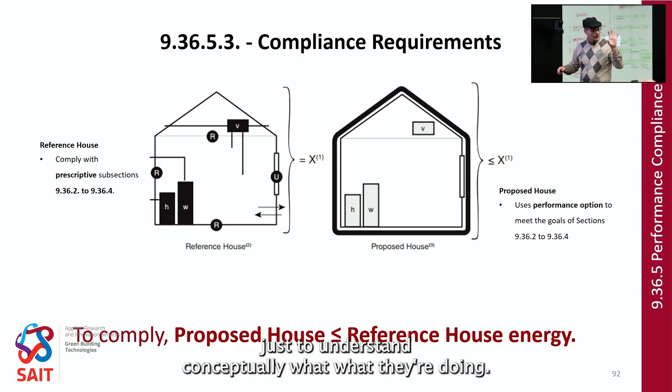I'm not going to spend too much time on here. This is just some of the things you have to be aware of. So fenestration and door to wall ratios, the equipment listings. This isn't a course on how to become an energy modeler. We can give you that course, but not today.

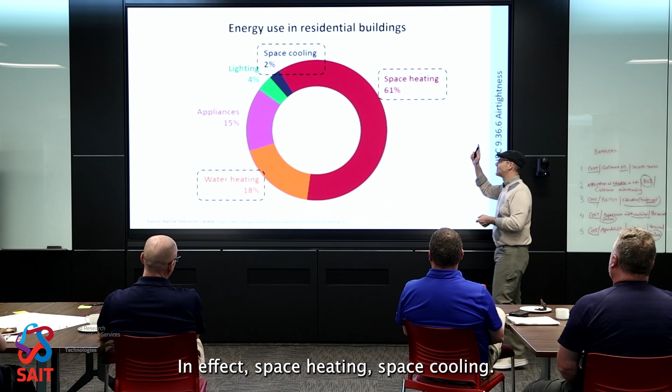Airtightness is a different story though. So airtightness, that's a misprint. That's on me. Sorry. It affects space heating, space cooling. Doesn't affect water heating. There are some fundamental changes in air barrier testing. Number one, there's the idea of performance levels. Okay? That's one of the fundamental concepts. The other one is this.

When you get a blower door test, if I just say blower door test, does everybody know what that looks like? Okay, good. Then you're probably familiar. There's two common ways of doing it. One is you pressurize to 50 pascals. One is you pressurize to 75. I don't know if anybody's ever looked at the wind speed you need to generate 50 pascals of pressure on the face of a building, but it's like a 40-mile-an-hour wind. It's huge. So that really applies only on a few days of the year.

So there is a correction feature in this now. They're talking about, well, what does it leak at 10 pascals? That's what a building typically experiences. And so it's trying to make the models more accurate. And that's a big difference because, we'll touch on it in just a second, depending on how you measure these things. My first degree is in physics, I have to bore everybody with this.

We think of air as being this weightless, flexible thing because we're so used to it. But air has weight and it has viscosity. So if I have a hole this big, and I'm going to make up a number, 2 square feet, or I have 10,000 holes that total 2 square feet, the airflow through those two different things at different pressures is night and day. Literally night and day. There's aeronautical engineers who spend a career writing PhDs on how to calculate that. It is not simple. But just trust me, because air has a thickness and a viscosity, it doesn't want to flow through 10,000 little holes the same way it does through one giant one.

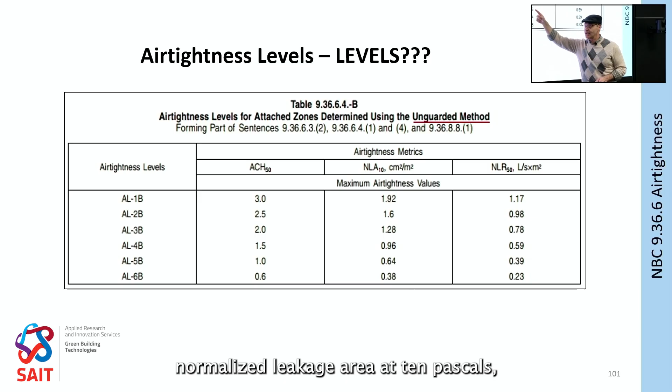This is just an illustration. Air leakage, not surprisingly, means more energy consumption. Watch out for the gaps at transitions. Covered that already. Determinations of this stuff, there's a lot of ways to look at this. I just want to point out something. There are now 3 ways to measure air leakage: air changes per hour at 50 pascals, normalized leakage area at 10 pascals, and normalized leakage rate at 50 pascals.

You don't have to worry about which one you're going to meet. That's for your energy advisor to take care of. Just be aware they're there. And the reason we have this is when we get to tier codes. So all of these represent a different amount of air leakage and energy loss related to air leakage. And we needed those because of where we're headed next, tiered energy performance.

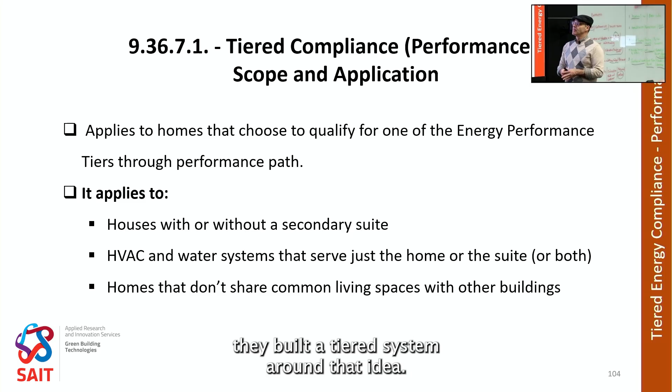So 2 ways to measure to comply with tiers in 9.36. First, performance modeling. So just so you know, about 2/3 of the 9.36 submissions we see in the City of Calgary use performance compliance for all the reasons I mentioned earlier. Because of that, logically, they built a tiered system around that idea. The good part is you basically do exactly what you did for a performance model. You just have to report the numbers in a slightly different way, which is good.

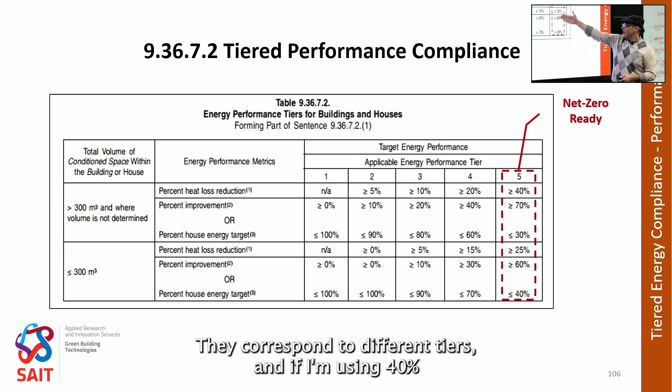But credit where credit's due. Tiers in the code ask you to change almost nothing about the way you do things today, which is really smart. Because if you were asking me to change my ways, it's probably almost impossible to implement. But what it is, is basically this. I'm going to have 2 size categories. Talk about that in a second. I basically have anywhere between 100% of the energy consumption all the way down to 40. They correspond to different tiers. And if I'm using 40% of the energy of the building, I consider that net zero energy ready, my highest tier.

So all I do is I report, remember I said, in order to comply with the performance model, performance simply has to use less energy than reference. This just tells me how much less I have to use. That's it. 1 additional calculation is all I need to do to comply with performance tiers. I do it the same way. I build the same model. I can build it however I want. Again, it doesn't take any intrinsic flexibility. It just says, instead of the target being 100% or up to 100%, now it's up to 40%. That's it.

Prescriptive path. I sometimes joke about this. I've told my colleagues, I will happily buy them lunch if they can find me somebody who does this more than 5 times a year.

But we built a points system for prescriptive compliance. And we'll break it down really simple. They haven't done tiers 3, 4, and 5 in 9.36 because points at those levels of performance are really challenging. And when I walk you through the tables, I think you'll understand why I say that. Essentially, if I have 0 points or less than 10 points, I'm doing tier 1. If I have 10 or more points, I'm doing tier 2. So what are these points? Because that's probably the next reasonable question.

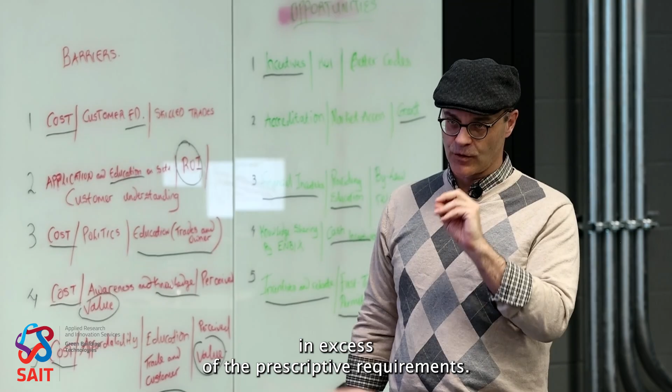I get points for doing things in excess of the prescriptive requirements. The process is identical. The calculations are the same. I just have a different expectation of performance. So, for instance, let's look at above grade walls. In our heating zone, if I do 2.97, and when you go to the code, RSI value 2.97 is exactly what you will get to do basic code compliance. Not surprisingly, I get exactly 0 points from meeting code. Kind of makes sense. If I go to 3.08 with an HRV, I get 2.1 points. 3.69, 6.7, so on and so forth.

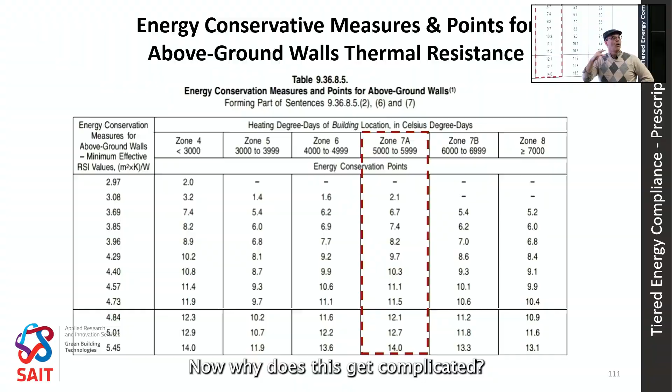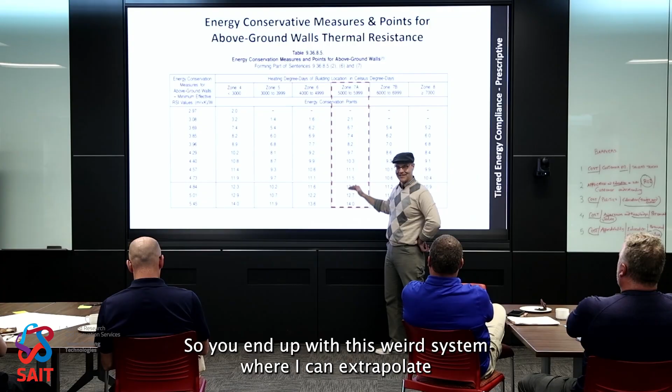Now, why does this get complicated? 2 reasons. Number 1, adding all of that additional information and calculation probably costs me more than just doing a performance model. So that's why I think tiered performance is going to be the way to go. But the second part is, you will notice that these are not continuous across any row. And the reason being is this all had to be done on model data that realized that in a different heating degree day zone, I have a different baseline. So you end up with this weird system where I can extrapolate vertically in a column, but I cannot do so horizontally.

And most things in a code, I can extrapolate. So limiting distance is one that's famously done for extrapolation. And what you do is you literally say, okay, once I'm this far from a property line, I get this percentage of unprotected openings. The next number is this. I can just assume a line between the two. Let's do it. This isn't linear. This can't be extrapolated for heating degree day zones. It's a really weird thing in that sense. That's, I think, part of the reason you're not going to see a lot of it.

But in an attempt at fairness, there is one for envelope requirements. There's another one for fenestration, so windows. Same idea. Doesn't talk about the area of the windows, just talks about the performance of the windows.

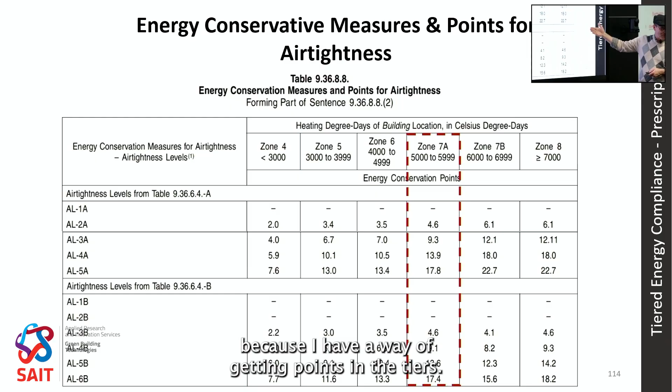There's one for, what is this one? The below-grade walls. This one is for air tightness. So this is where, if you recall just a minute ago, I said, here's the air tightness levels. That's why we had to build all of this, because I have a way of getting points in the tiers. This one is for ventilation system, service hot water. This is the interesting one.

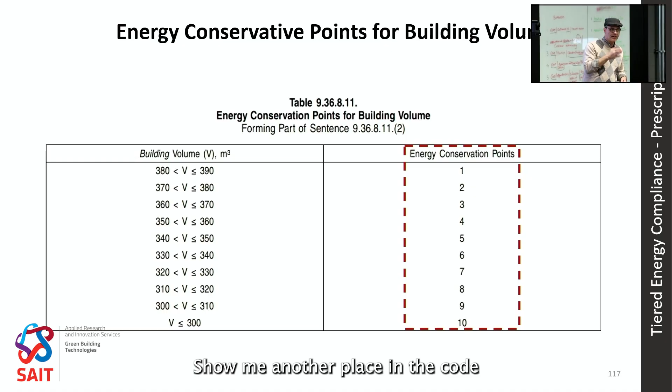And I'm going to ask your indulgence for me to soapbox for just 1 minute. I dislike this with the fire intensity of 1,000 suns, and I'll explain why. So what this says is, if I decrease the volume of my building, I get energy conservation points for it. You're rewarding geometry. Show me another place in the code where I reward geometry. It doesn't exist. That's a really interesting thing for me, and I'll explain why I think this is important, and it will tie into the kind of exercise we'll ask you to finish the day with.

If I have written a code that is geometrically agnostic, doesn't tell me what shape the building should be, it just says here's the bits you need to consider. And indeed, if you use a performance model, I'm going to ask you to hold that geometry to be the same. To now say, oh, no, you should get points because you've made a smaller building. I don't know if that's the right thing to do, because a code is a minimum standard. I can wrap my head around that. Do this and you've met code. How many times have you used that phrase? This meets code, right? Now it's saying, here's a good design principle.

If you're writing a code, you probably shouldn't be writing a best practices manual, because they're intrinsically different documents. Again, code is a floor, not a better way to do something. And that's kind of the reason this exercise is meaningful, because to me, the better way to do this is, how do you incentivize people to realize a smaller building is more energy efficient and build that, as opposed to weirdly rewarding things in a very complex compliance path.

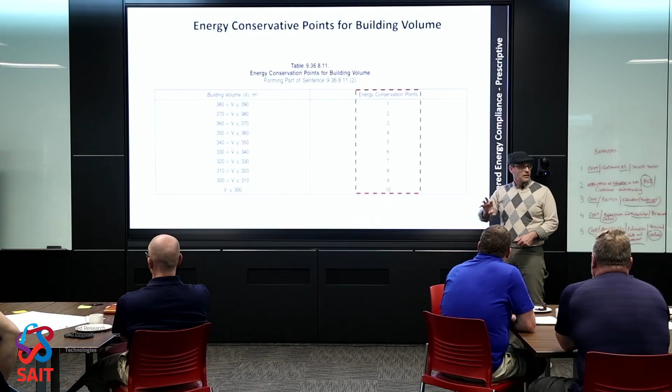We know there's a certain amount of points associated with the size of a building. If the city of Calgary put in an incentive that said, for every building volumetrically less than 300 cubic meters or 10 points in the tiered system, we'll give you a $5,000 incentive. You can easily build programs based on all of these things. One of the good things I will say about the point system is it shows links that you would not normally intuitively make. A lot of people would never think about window performance separate from wall. But the points really do force you to think like that and how much better it has to be. So the short answer would be, no, the point system was not designed to create incentives, but it is very easy to imagine an incentive system based on specific point allocations.